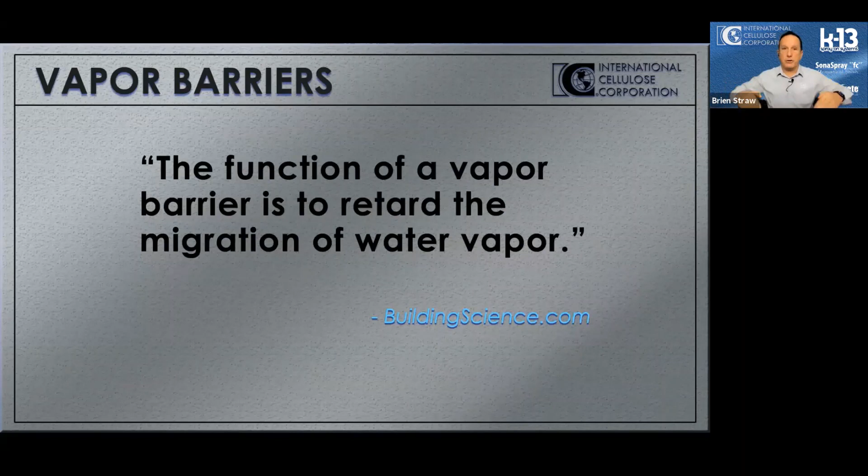We'll start with vapor barriers. A vapor barrier is basically intended to stop the flow of water vapor from one place to another. So you're in a house and you want to keep it from going into the building assembly or whatever it may be. That's basically the object of a vapor barrier—we're trying to prevent water vapor from moving from one space to the other.

The important thing to keep in mind to understand vapor barriers is that you apply that vapor barrier to the warm side of a building. If we use this example of a typical wall assembly for a residential home, it looks like it's a cold day outside—only 10 degrees on the thermometer on the right. On the left is the inside of the home, where it's about 70 degrees. So what you have is you're looking to keep the water vapor from the warm side, inside this house, from getting into the wall assembly, where if it hits that cold air, it's going to drop the water molecules and liquefy.

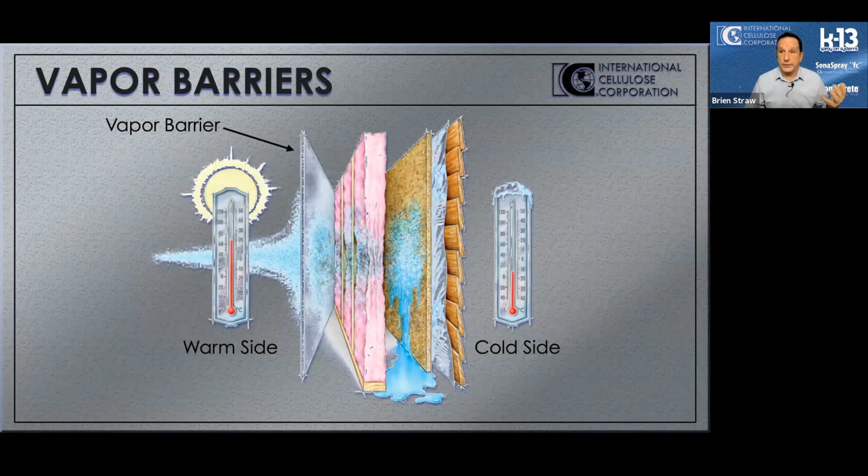That water vapor is going to turn into water, and then you see the mess that you've got, as in this example. The best demonstration I can come up with regarding a vapor barrier, or the need for one, and how water vapor works, is really a soda glass just like this.

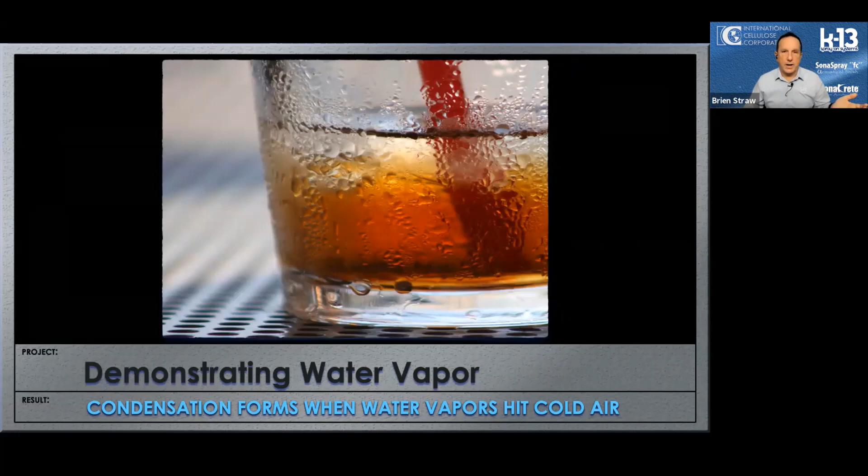You've got ice cold Coke inside the glass, and it's a nice warm day outside. What we're used to seeing is water molecules, or water vapor, forming water drops on the outside of that glass. The water vapor isn't leaching through the glass from the cold Coke—there's air on the outside of the glass that's warmer than the glass, and it carries water molecules in that air. When it gets cold enough, it drops that water molecule, and that turns into liquid water. That's what you're seeing applied here on the outside of the glass: warm air hitting that cold surface, those air molecules drop the water, and then you've got it forming on the glass.

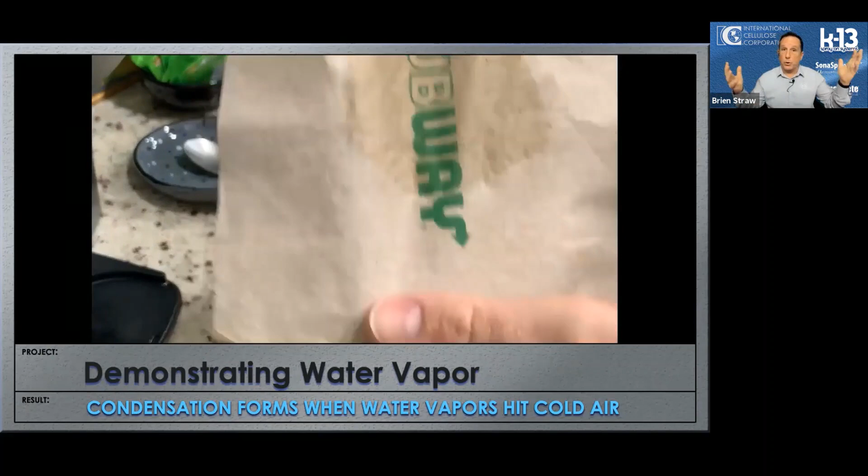Another example would be a cup of coffee. You've got hot coffee, and the temperature in the room is cooler than that. As you can see with the napkin, the outside is where that water is going to drop—that air leaves the water alone, drops it off, and then you've got water on the outside of that napkin.

But basically you've got a four-fold napkin, right?

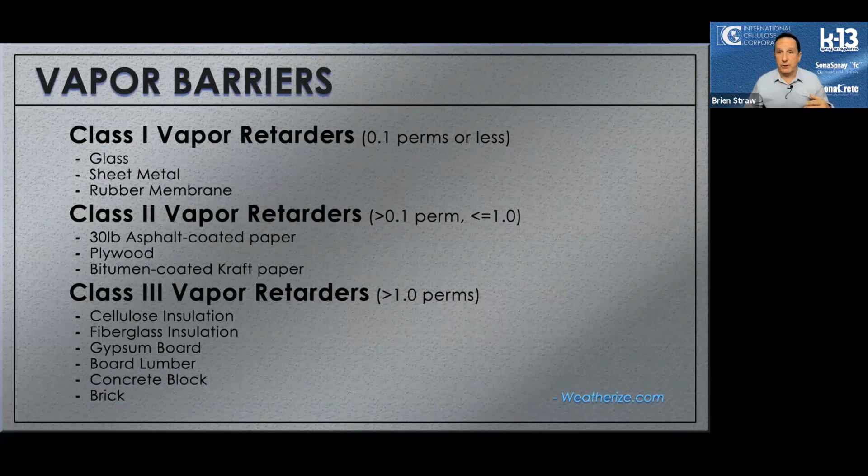The object obviously is to prevent the water from getting into the assemblies. But the problem is when water does get in, you want to be able to let it get out, right? This is an issue because water vapor, if you prevent it and put it on the inside of that house, it's going to do just as good a job keeping whatever water gets in as it does retarding the water from getting in the first place.

And even any class 1 vapor retarder is basically going to leave in the wall assembly somewhere, that 0.1 perm will end up being about 5 ounces of water in a typical wall assembly in a typical cold home in the winter.

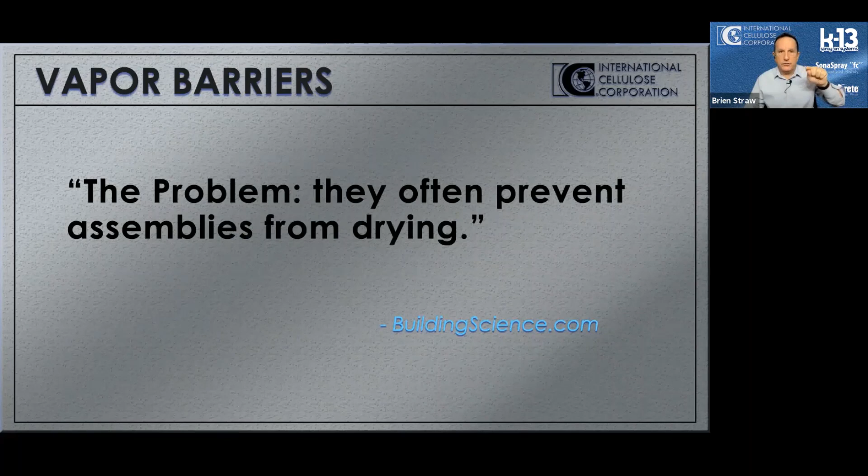If you have just a 1 inch square in that water vapor barrier, like where nail holes went or there's space around sockets, things like that, a 1 inch square is going to allow about 4 gallons of water into that wall assembly, a typical wall assembly in a typical winter in the north. So it lets in a lot of water vapor.

So what you want is to try to keep out as much water vapor as you possibly can, but you want to be able to let it get out if it can get in. So you may not always need a vapor barrier, I guess is the point of all this. This is what I've been able to conclude based on my knowledge and education.

You consider vapor barriers in a couple different regions. In the northern regions, you've got different climate zones. I would say 5, 6, and 7 obviously are going to consider vapor barriers in the winter. And then zones 1 and 2 may consider them or may have a need for them in the summer. In Miami, it's very hot, and so you have a situation where you've got a cool space above and you may need a vapor barrier.

Now when it comes to our material, again we're basically a spray applied thermal insulation. That would be the applicable product with regard to vapor barrier situations. Then in those zones 5, 6, 7, and 8, you don't really have to concern yourself with a vapor barrier and our material. The reason being, that vapor barrier would have to be on the inside of the building, or the warm side of the building.

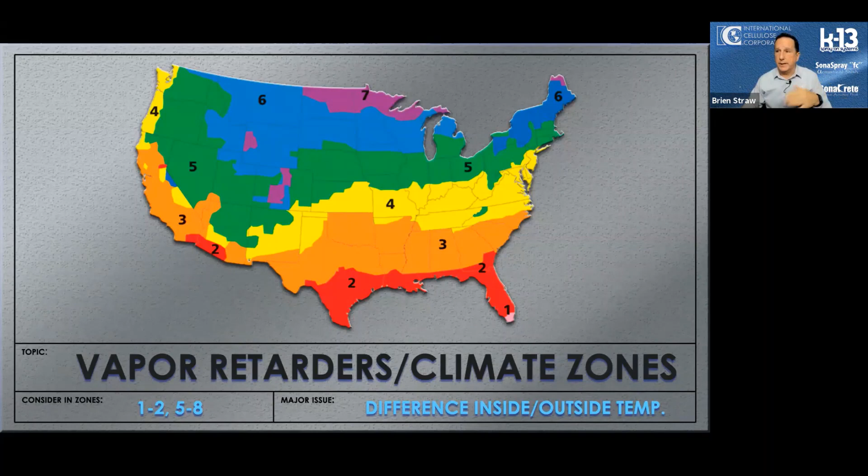So you might need it between the parking structure and the occupied space of this hospital above, because they keep the temperatures about 60 degrees, something like that. And if it's 95 every day, you've got a big difference in temperature. In those kinds of applications, the thermal application we use is very popular in these types of situations.

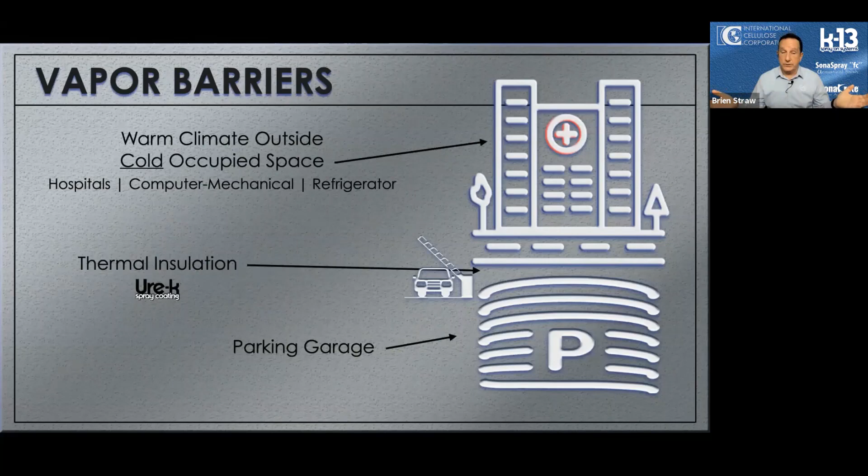It's something we make called Ure-K. What Ure-K is designed to do is go over and protect any closed cell foam, or any spray foam actually, but in this case closed cell foam. The reason we would use closed cell foam, or why closed cell foam is very popular in this kind of application, is because it does provide a vapor barrier.

So if we're in South Florida and we've got an operating room above us at 55 or 60 degrees, whatever the doctor wants to keep it at, and it's 95 outside, then we might need a vapor barrier to protect that. We would need it on the warm side, which would be the outside of this situation.

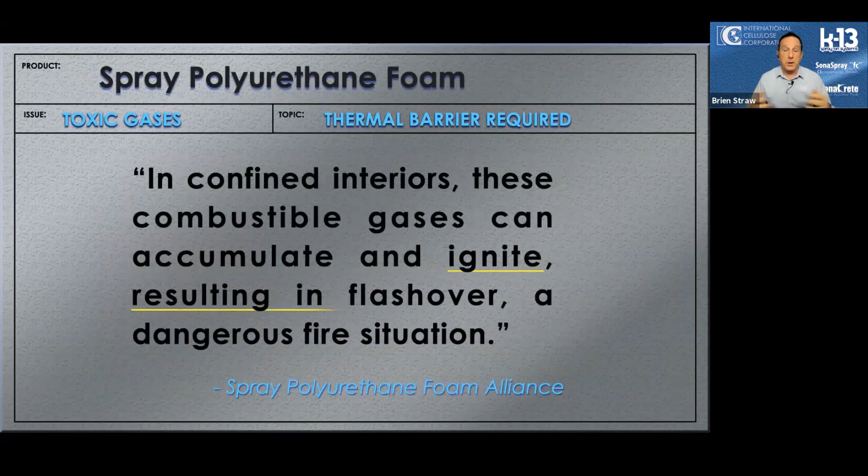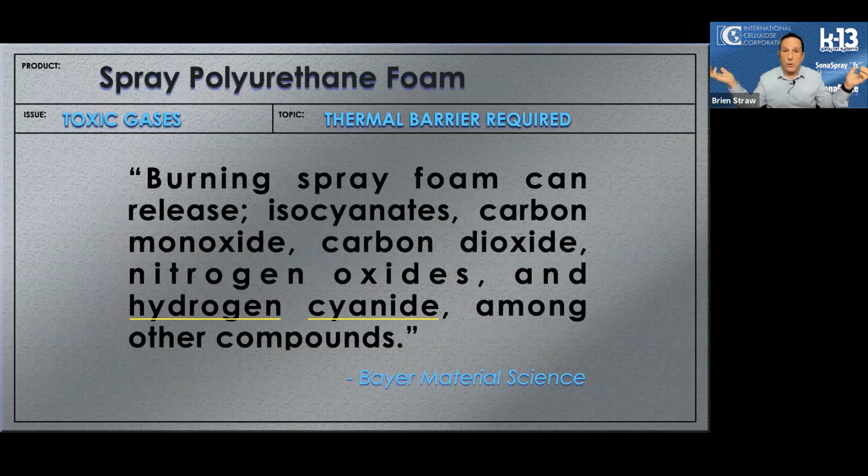Now the problem with spray polyurethane foam, it works very good. I can understand the need for closed cell foam because again it provides a vapor barrier. Open cell foam, not so much. But spray polyurethane foam creates a black smoke. It creates combustible gases that can create flashover, in which the entire fuel assembly, all that foam, would go up because it's all liquid fuel, and it has some toxic chemicals involved in it.

So you can't spray polyurethane foam, open cell, closed cell, whatever it may be, in an inhabited space. You have to use what is basically considered and defined as a thermal barrier. So for those of you who joined today hoping thermal barrier was going to talk a lot about thermal insulation, obviously it does apply in this application.

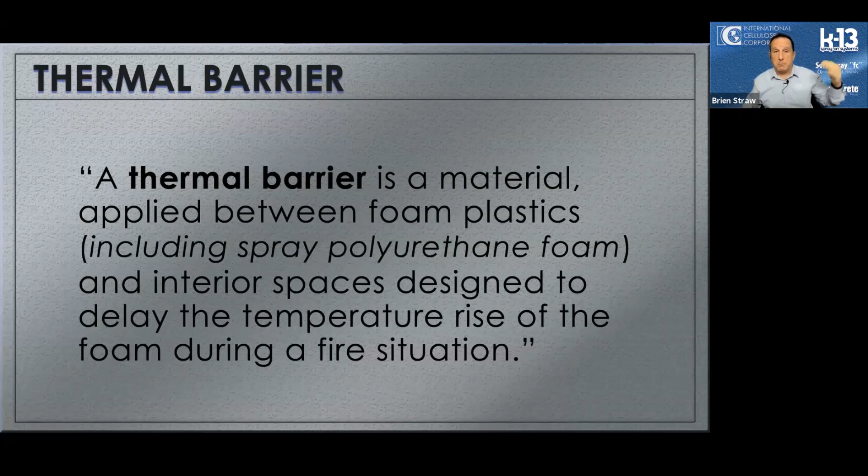We're using it for closed cell foam, but a thermal barrier is just basically a material that's applied that will coat that polyurethane foam or that plastic and protect the interior spaces, the livable spaces, from a fire in the event of a fire. And the reason is it's going to prevent the temperature rise of that foam. So it's not only going to keep it from burning, it's going to prevent it from actually rising in temperature.

And so that brings up, with regard to thermal barrier, the difference between an ignition barrier and a thermal barrier in these types of situations. An ignition barrier - if I had basically a Bic lighter and I took it to a piece of fiberglass, could I light that fiberglass on fire? And the answer would be no. And that's why it's okay as an ignition barrier.

And that's why you see it in places like crawl spaces or attics where there's not a lot of ventilation, there's not much going on, you're not storing things in there, and all you're looking to do is prevent that material from catching on fire from an actual flame. And that is what they consider, as you see basically in that first banner, a 5-minute egress, 5 minutes before the place is likely to go up.

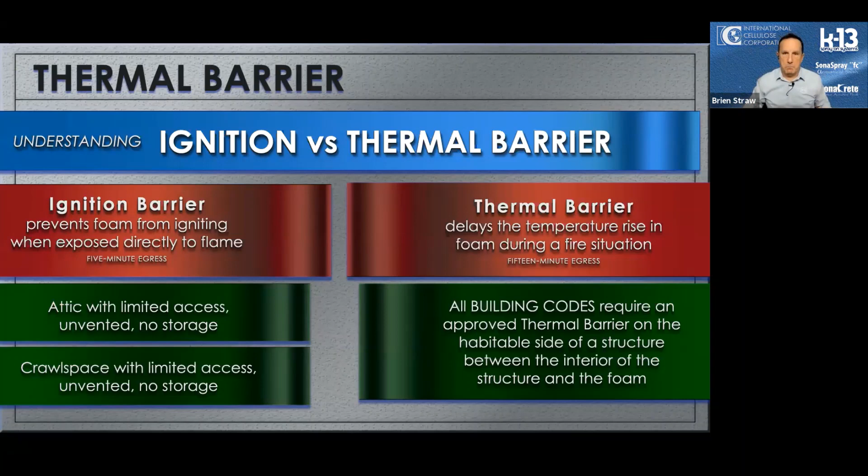A thermal barrier is different. It is a 15-minute egress, so it's giving you 15 minutes, and it's not only preventing, let's say, you taking that flame and lighting that material on fire, it's also preventing the heat from getting hot enough for that to combust. And that's the difference between a thermal barrier and an ignition barrier.

And so when it comes to closed cell foam applications, what I hope you will consider, because you will need a thermal barrier, is our Ure-K product. And the reason for that is that I don't necessarily have a problem with an intumescent paint or DC315, which is a very popular application for going over these closed cell foams. It's not that that manufactured product is necessarily flawed, or in any case there's anything wrong with it. It's just that it's only as strong as the weakest point of that application.

It's spray applied. So anytime you've painted a room and you've come back the next day and thought, I missed a spot - well, if you're doing that with an intumescent paint to protect your closed cell foam or your open cell foam, then you're going to run into a problem.

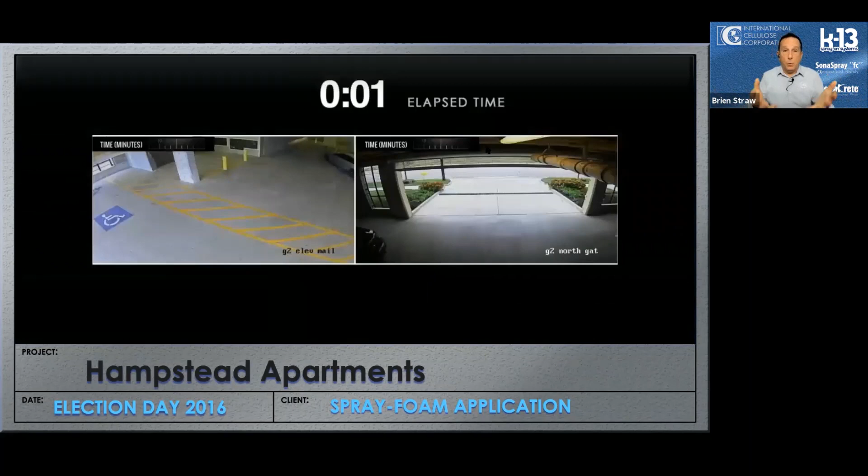We had that kind of situation here in Houston, Texas 4 years ago. It was basically election day, and a car fire started in a parking garage. By the way, car fires are the number one reason fire departments are called to fires. Well, it took from the time that woman smelled smoke in her car to where the fire out of the car caught the ceiling on fire - that took, as you see, about 5 minutes and 40 seconds.

In less than 30 seconds, the rest of the place went up, because that's that flashover. Once it caught fire, the entire foam on the ceiling is a fuel source. And so that's what you're seeing. That's a 450 smoke development, right? So that's your Class 1, Class A situation. It's a very difficult situation.

You wouldn't want it. Ure-K is applied at a 1.25 inch application, right, so it's a thicker application. It's going to be protected. You don't want to deal with this. Again, that's 450 smoke development. That's Class 1, Class A.

Ure-K has been safe enough that it's been used in a number of different firehouses across the United States as safe to go over foam.

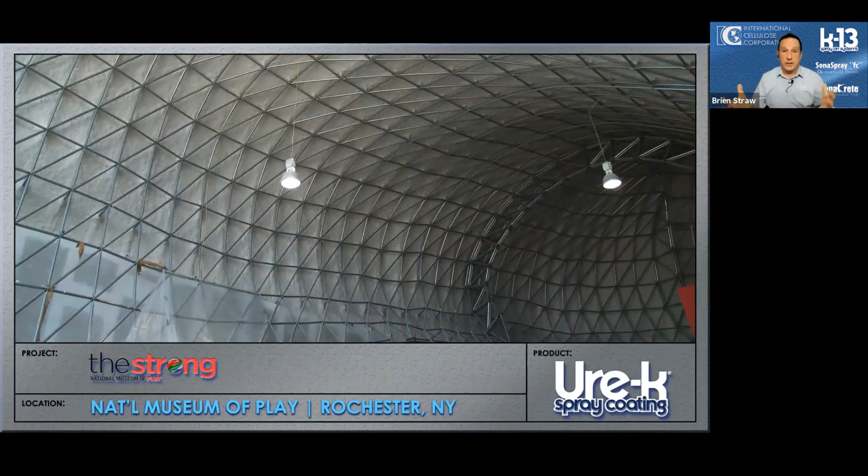It's in a children's museum in upstate New York, safe to go over foam. It actually gives you the added bonus that an intumescent paint wouldn't, in that it has an R value of 4.5. So if it's a thermal application, you get a little bang for your buck there. And then when it comes to an indoor acoustic application, like you see here, it's got an NRC of 0.95, so it's absorbing almost all of the unwanted echo and reverberation in the room.

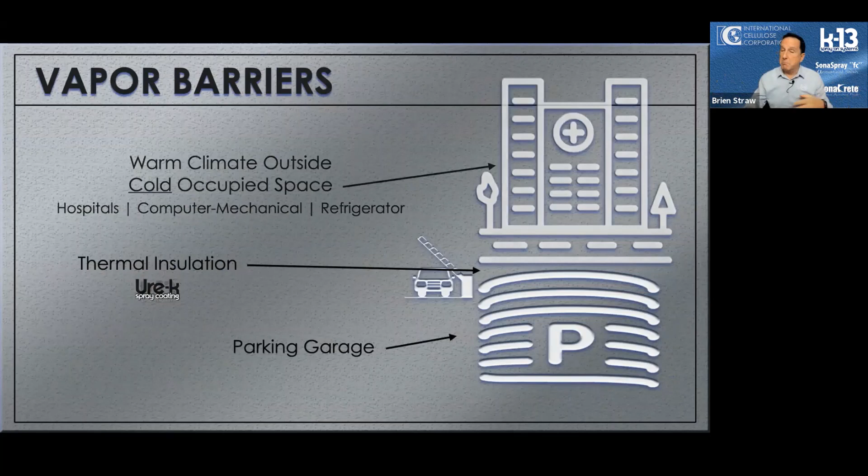So when we go back to vapor barriers, these are the applications, parking structures, things like that, where our thermal insulation is often used. And in this kind of situation, when we needed a vapor barrier, Ure-K is an outstanding application. But the fact of the matter is, most of the time a vapor barrier isn't required, and so what is used is our K-13 application.

So you've got a parking structure, let's say in Boston, and you've got that occupied space above. Well, the K-13 can work as an insulation. There's no vapor barrier required between the parking structure and the occupied space above. And then when it comes to acoustic applications, really there's no spot in that occupied space above the parking garage where people aren't using our product, whether it be restaurants or retail spaces.

Restaurants in particular, the noise is obviously very, very loud - basically about 15 decibels louder than a normal conversation. And when you consider just a 10 decibel increase is perceived by the listener as that sound having doubled, restaurants obviously have a lot of issues. So do offices, hotels, and apartments. We understand all those kinds of in-office applications of our acoustic materials, both K-13, SonaSpray, and SonaCrete.

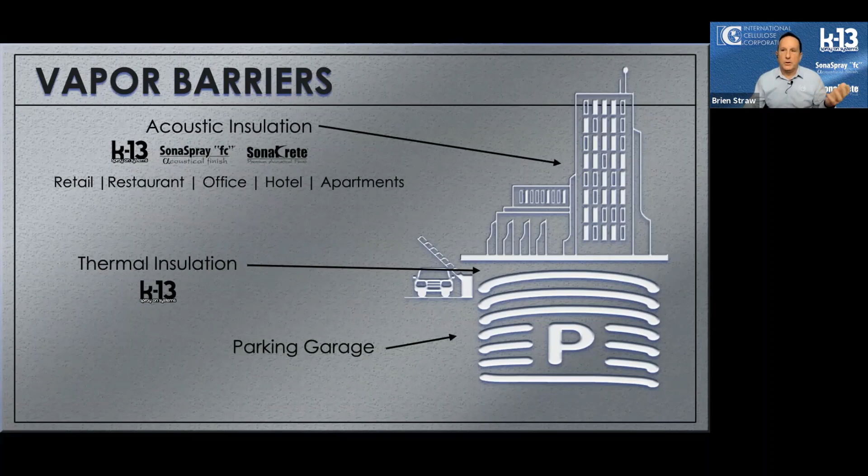I just realized I've basically told you all about our products and haven't even introduced ourselves. As I mentioned, I work for International Cellulose Corporation. We manufacture spray applied thermal and acoustical insulations under a number of different headings.

I guess we're the InBev or Anheuser-Busch of the spray applied natural fiber-based thermal insulation business. We are based in Houston, Texas - that is where our factory and manufacturing facility is. So every bag of material is going to be manufactured in the same place. Whether it's going to a job somewhere in the United States or somewhere across the globe, it's manufactured with the same high quality and the same high standards in the same facility in Houston, Texas. And we've been respected because of that high quality.

We've had an Underwriters Laboratory label on every bag of our material continuously since 1966. We are an ISO 9001 registered company, so we adhere to some of the highest quality standards in the world. And insurance companies like Factory Mutual love us as well - we've been doing field and follow-up testing with Factory Mutual since 1974. They actually have higher standards than UL, and we have never failed a test, and they have never had a claim against our material.

What I like most about our material is how green it is. It's not just that we have a low carbon footprint - our material actually sequesters carbon, which is why it is an M1 classified low emission building material. All our manufactured products are Green Guard Gold certified, and they're listed in the Mindful Materials Library, as well as the Sustainable Minds Transparency Catalog. And all our materials come with both an environmental and a health product declaration.

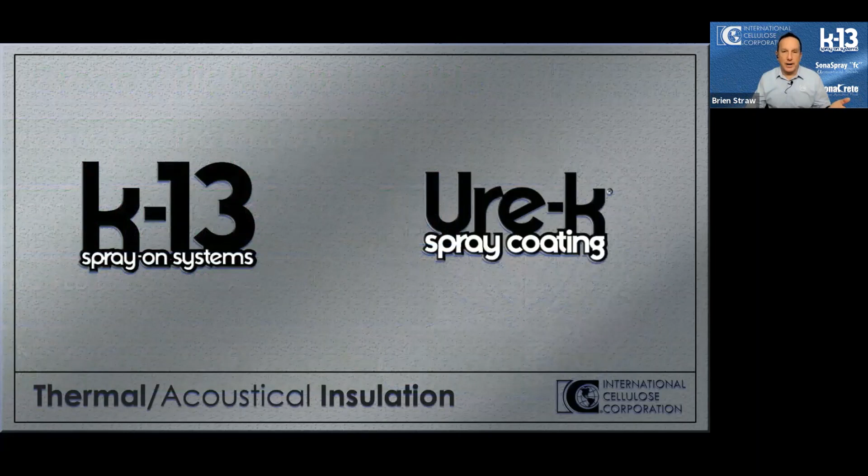I know I've already told you about this, so I buried the lead, but K-13 and Ure-K are our thermal application as far as spray applied insulation. Ure-K, of course, is designed to go over spray foam. And then from an acoustic application, both K-13 and Ure-K provide acoustic applications, while SonaSpray and SonaCrete are specifically designed for acoustic applications.

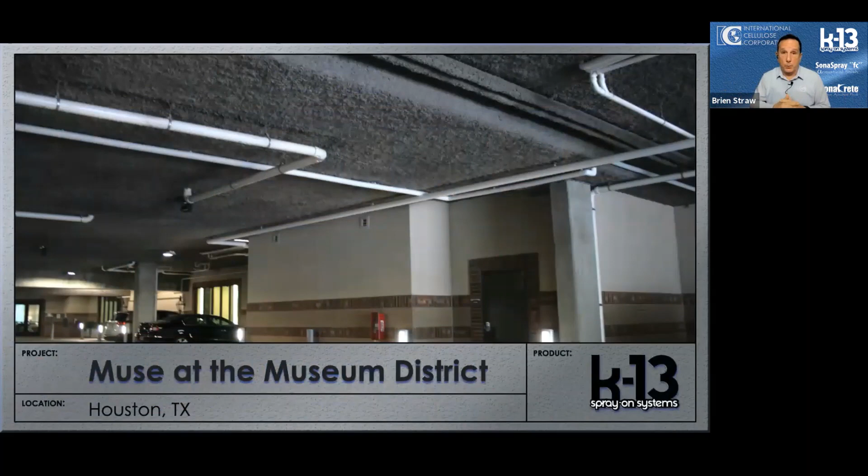Our materials, K-13 and SonaSpray, come in a number of different standard colors. Ure-K and SonaCrete come in white. And when it comes to the standard colors, honestly right now I would say gray is probably one of the more popular applications, whether it be light gray or regular gray.

When it comes to a parking structure, specify it in gray or light gray. For the same reason you don't walk on white carpet very often, you don't really want a white ceiling in a parking garage where there's going to be a lot of dirt, and white shows dirt. Gray does a much better job of hiding it.

Now, all our materials also come in custom colors. So if you've got a custom color you want, send us the Sherwin-Williams paint swatch, or give us the code number, and we will make a sample of the material for you. You will actually approve the color of your material, basically the fibers, before we go ahead and commit the manufacturing of your order.

Now, there are a couple of differences, I think, between our material and probably our most common competition, which would be spray applied fiberglass. And one of those, to me, is in fire endurance.

We all see the E84 test, right? When we're putting in a specification, that's usually what we're recommending. You've got to be able to pass that. It's a flame spread and smoke development test. We saw what the 450 smoke development looked like. Nobody wants to be there.

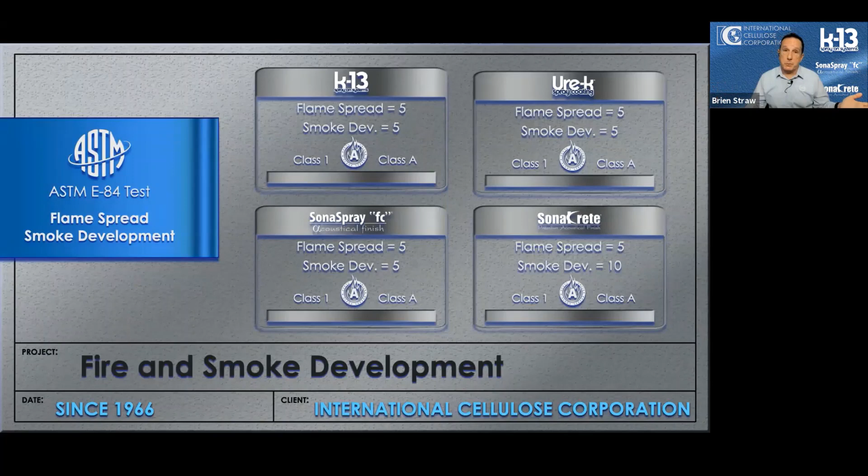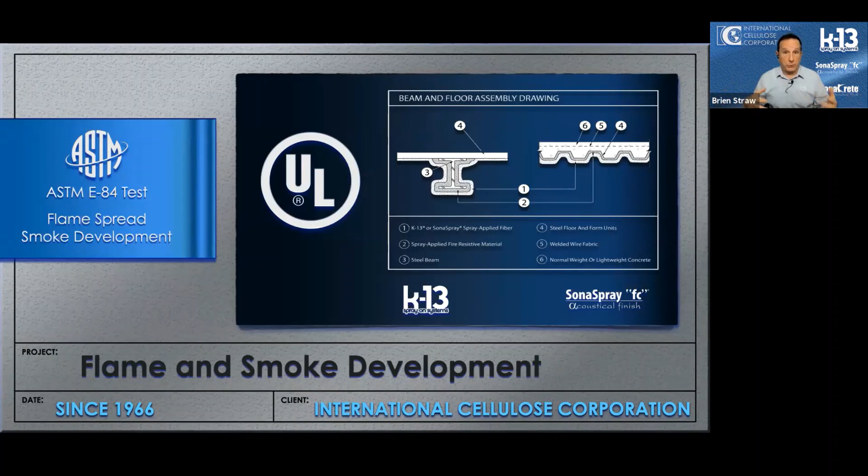As you can see, all our materials are Class 1, Class A rated with a flame spread of 5 and a smoke development of 5, with the exception of SonaCrete, which has a smoke development of 10. In fact, our material is so safe, it's in a number of different UL design assemblies as safe to go over fireproofing. Both K-13 and SonaSpray, you can get the design assemblies on the UL website or at our website and download them.

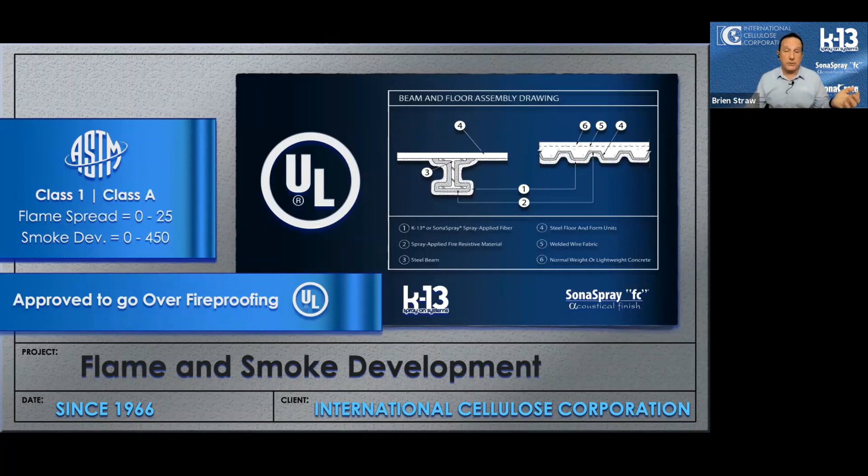Class 1, Class A is a flame spread of less than 25 and a smoke development of less than 450. Even though we have a combustible product, our material will not melt. It will not char, it will not burn either. It will char, but it will not melt.

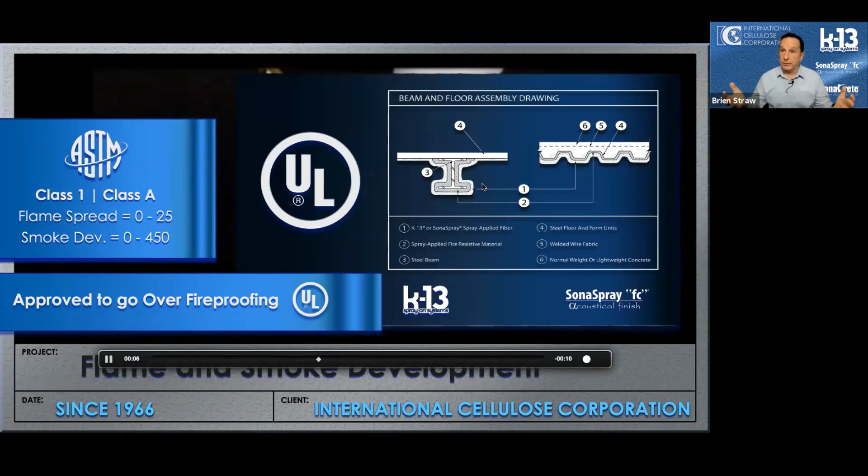The reason I bring that up is because I think this is also a very important indication of fire endurance. That is what is called an E119 test procedure, in which they take your material, subject it to up to 1500 degree temperatures for a 30-minute period of time, and see how well your material basically survives.

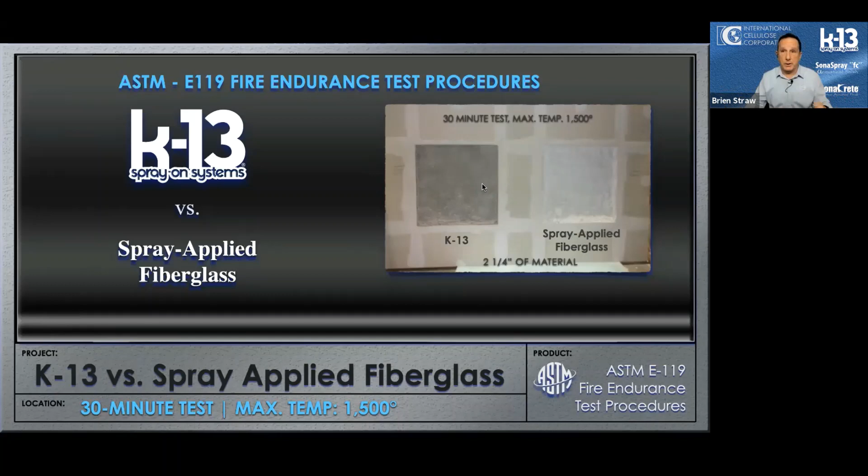This is a comparison between our material K-13 and spray applied fiberglass. It's a dramatization of it, basically a key point in the test. At 10 minutes, the temperature of the fire is 1,299 degrees Fahrenheit. K-13's internal temperature is 171 degrees. The sprayed fiberglass is 532 degrees. K-13 remains in place. The sprayed fiberglass begins to melt and drip.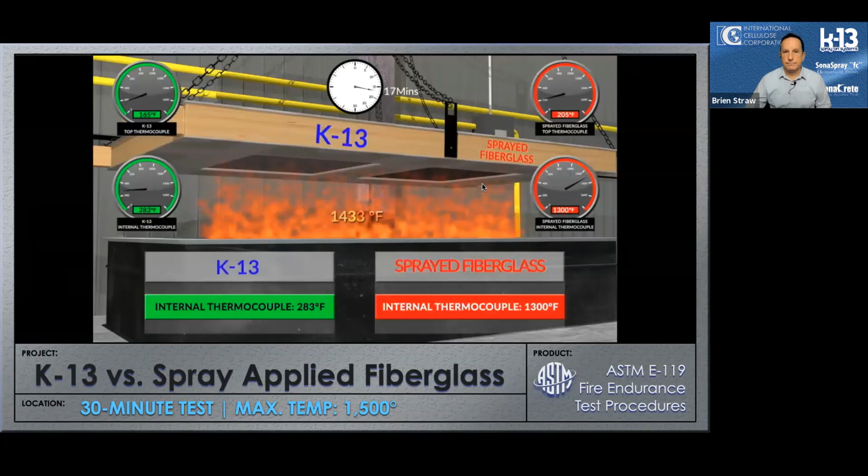Minutes later, the K-13 internal temperature sensor reads 283 degrees, and the K-13 remains in place, protecting the substrate. The sprayed fiberglass has completely melted from the substrate, leaving the gypsum board exposed.

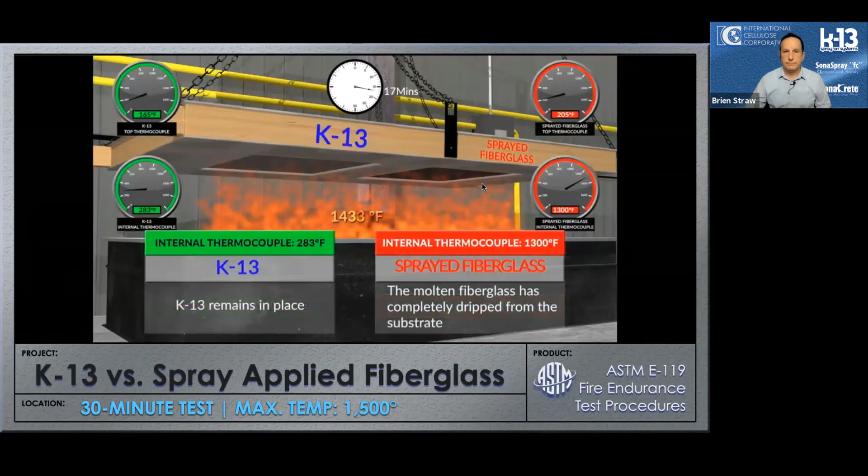So if we go back to some of those fire requirements, an ignition barrier, a 5-minute barrier, that's essentially what the fiberglass did. It's not that it combusted, but it started to melt within 5 minutes or within 7 minutes, and within 17 minutes it was completely gone.

On the other side, you see our material. Yes, it did char, but it's still there protecting the substrate and therefore protecting all the inhabitants down below, because it didn't allow anything to happen.

Not only, honestly, on a 30-minute test did the fiberglass completely melt away, but you do see damage to the drywall or the gypsum board in the space. So you even saw damage to a 1-hour fire rated material.

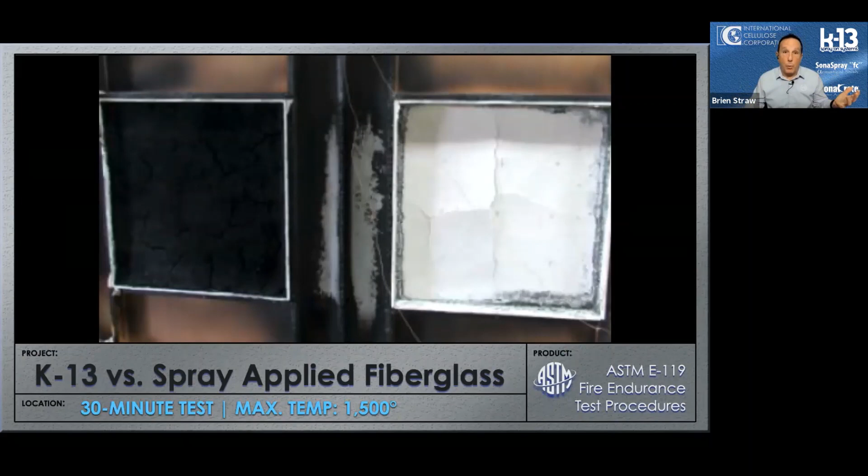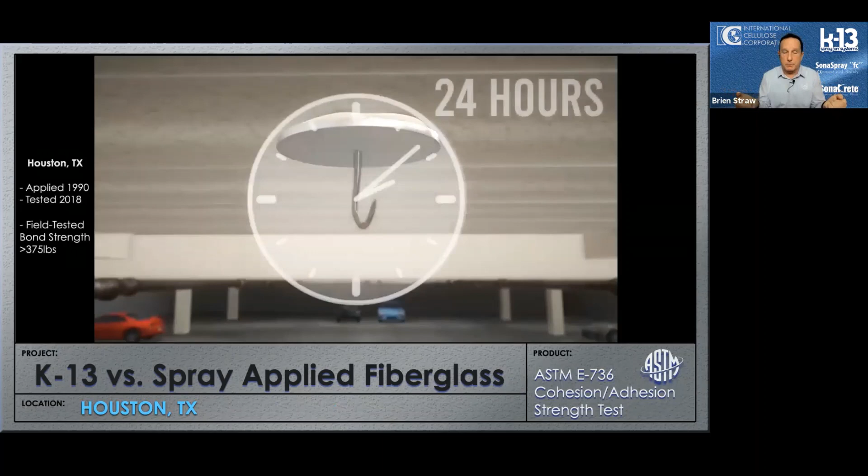The other thing that I think is a big difference between our material and spray applied fiberglass—and look, I understand we're often competing against that in parking structures and things like that, because the R value is very similar and the acoustic values are very similar.

I think the fire endurance is completely different, and the bond strength is completely different. This is an example of a test where they glue one-pound hooks to your material, wait 24 hours, come back, and see how much weight it takes to pull that hook from your material.

We tested one not too long ago here in Houston, Texas, on an almost 30-year-old project. That's almost 30 years of heat and humidity in Houston, multiple floods, multiple hurricanes, and it still tested at a bond strength of greater than 375 pounds per square foot. Once properly applied, the material isn't going anywhere.

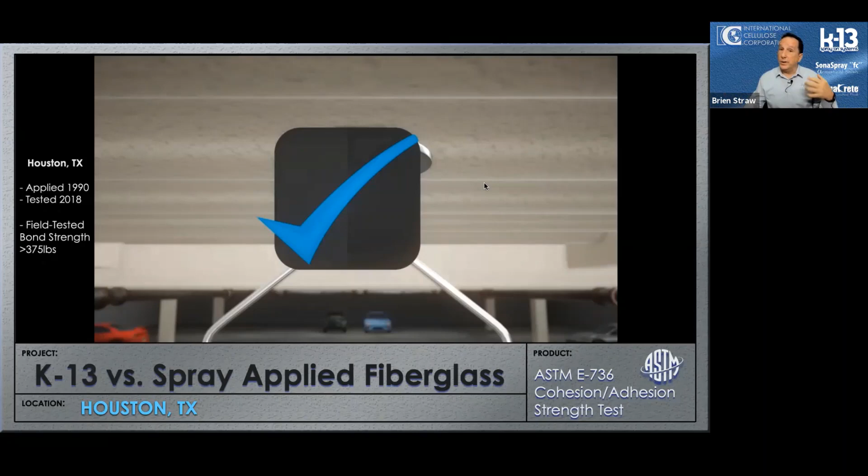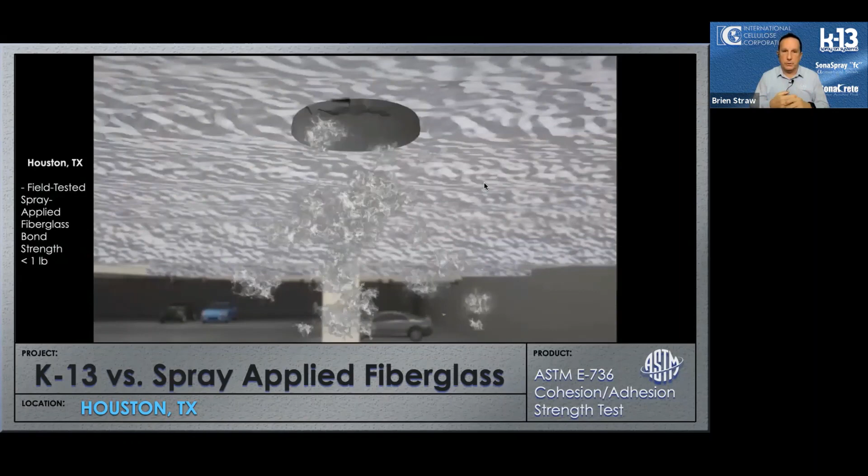We went down the street and tested a spray-applied fiberglass application in a parking structure. Not only gluing it, but duct taping it, they couldn't even get the one-pound hook to adhere to the material. So it basically had a bond strength of less than one pound. And again, once it goes up, you want it to stay up. At least I think so.

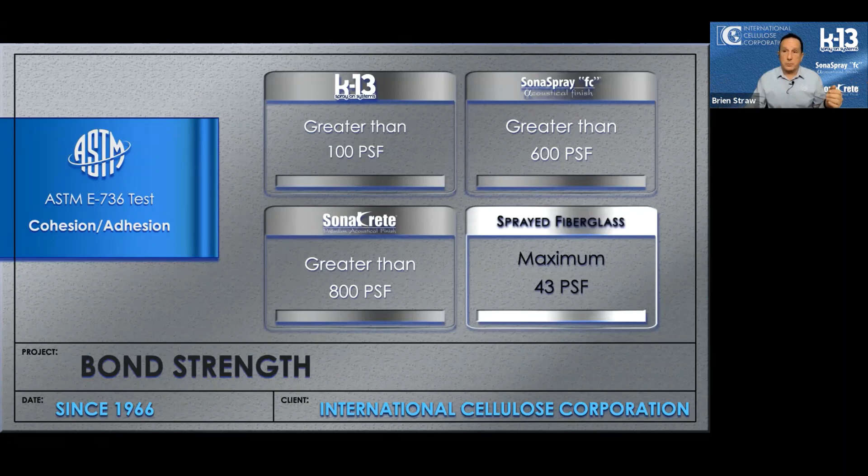In specifications, when it comes to downloading the specs to use K-13 in our material, we use a bond strength of greater than 100 pounds per square foot. But as you saw, an almost 30-year-old application had a bond strength of greater than 375. For SonaSpray, it's greater than 600 pounds. For SonaKrete, it's greater than 800 pounds. Under test conditions, so assume these are best-case conditions, spray-applied fiberglass has a maximum bond strength of 43 pounds per square foot.

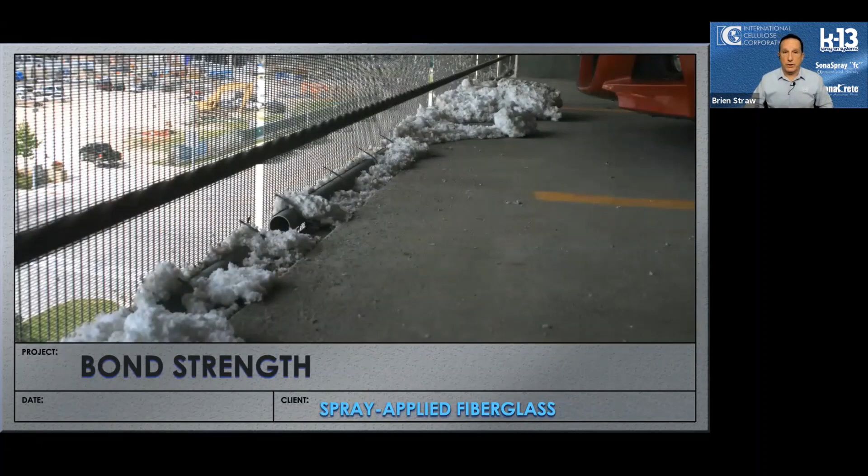So this is what you end up with, or could end up with—wind damage, as you're seeing in a parking structure in Austin, Texas. That's not a couple inches of fresh snow in Chicago, that's wind damage, and that's your spray-applied fiberglass on the floor in Austin, Texas.

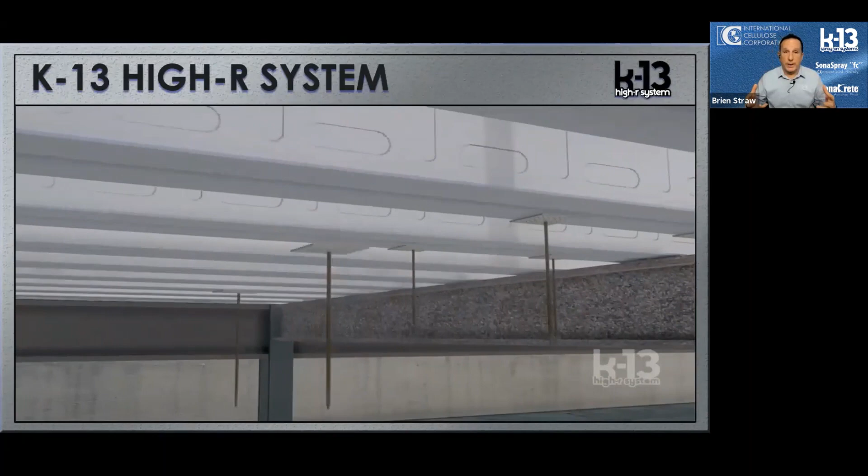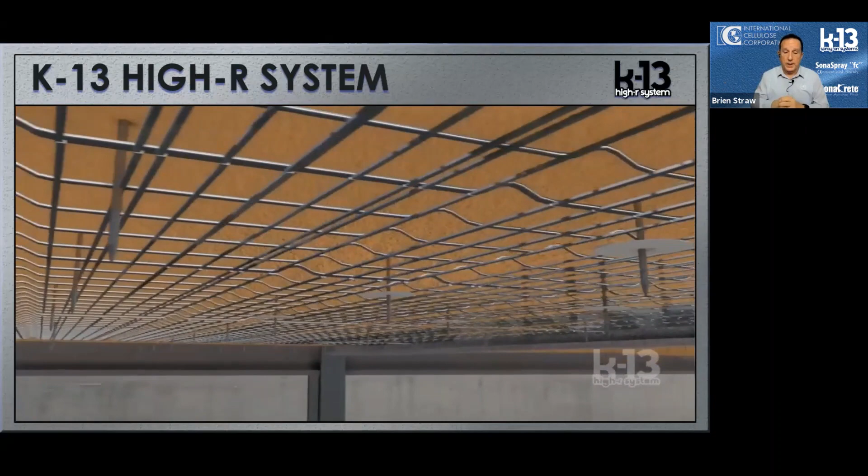Because we have such a great adhesive system, it allows us to do things with K-13 when it comes to thermal applications, going all the way to an R38. We call this a K-13 high R application. They can apply up to 5 inches of K-13, come back and put in a memoryless wire mesh, and then go up again another 5 inches.

Here's an application at the Apple retail store in Providence, Rhode Island. Simon manages that mall, so they're the ones paying the utilities. They were saving so much money on utility costs underneath the Apple store that they went in and did the rest of the parking structure, replacing whatever insulation was there and putting in K-13 in a high R system to save on energy costs. So it really can make a difference.

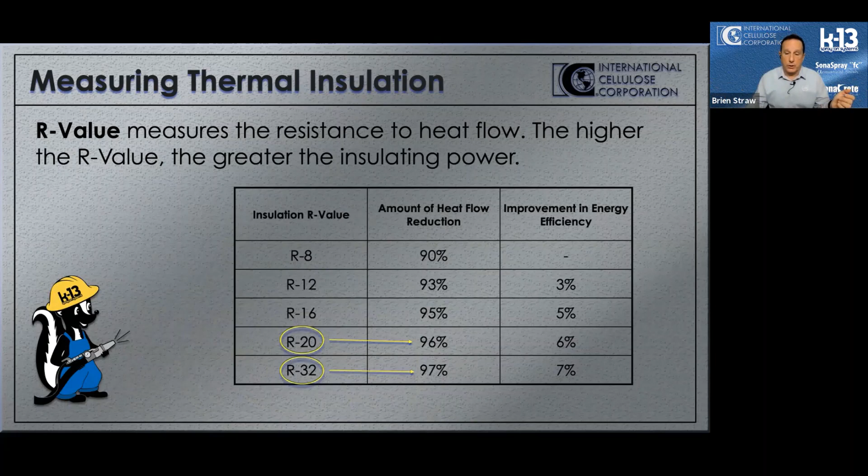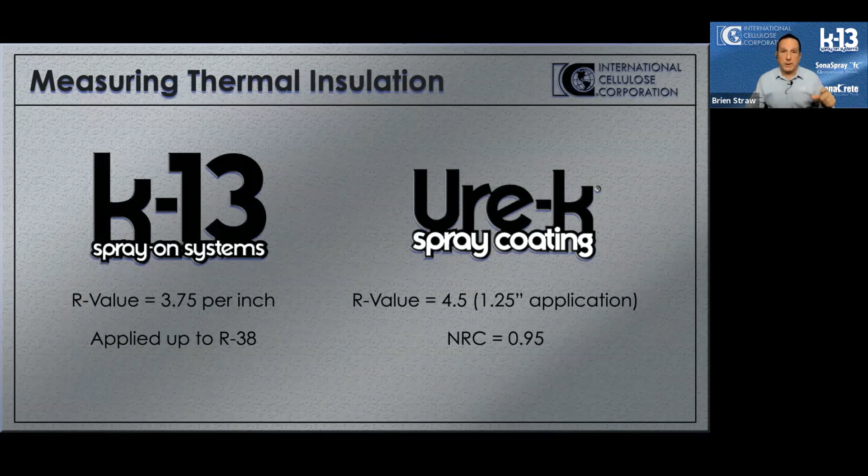From thermal products, K-13 has an R value of 3.75 per inch and can go all the way up to R38, as you saw. And as mentioned earlier, the R value of the Ure-K in that 1 1/4 inch application is 4.5, with an overall NRC of 0.95. So whether you're looking at an application in Boston or in Waco, Texas, and you're not necessarily concerned with needing a vapor barrier, our material is a very green way to provide your thermal barrier and thermal protection.